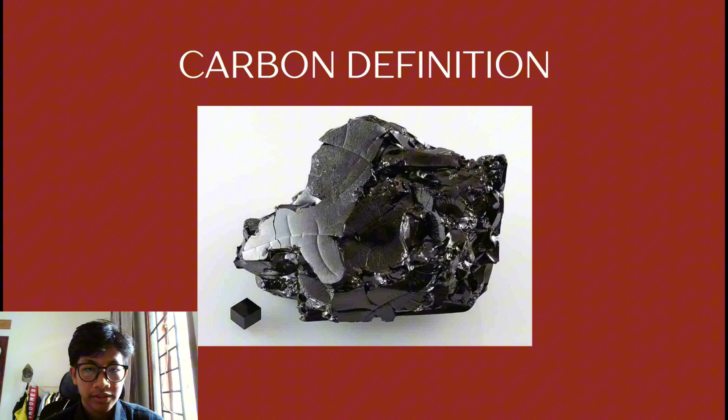Today we are going to discuss carbon and its various types. Carbon is unique because it doesn't fall within the traditional metal, ceramic, or polymer classification. To ensure technical accuracy, our discussion today is based on several key references. Our main source is Materials Science and Engineering: An Introduction by William Callister Jr. and David G. Rethwisch, 10th edition.

Carbon, the definition. Based on the textbook we use, carbon exists in two allotropic forms, diamond and graphite, as well as in the amorphous state. The carbon group of materials does not fall within any of the traditional metal, ceramic, or polymer classification schemes. This treatment of carbons focuses primarily on the structures of diamond and graphite, and discusses the properties and applications, both current and potential, of diamond and graphite, as well as the nanocarbons.

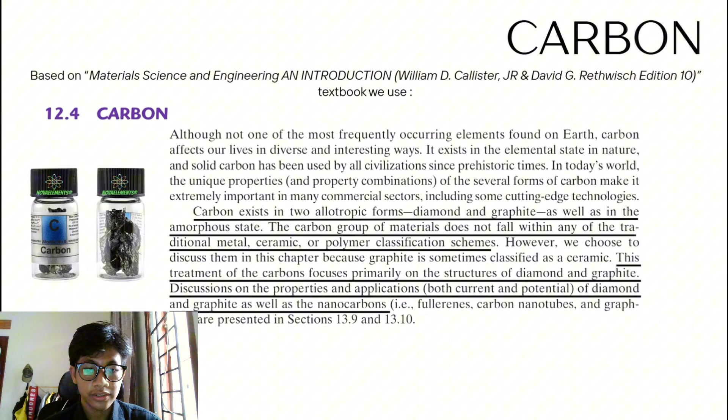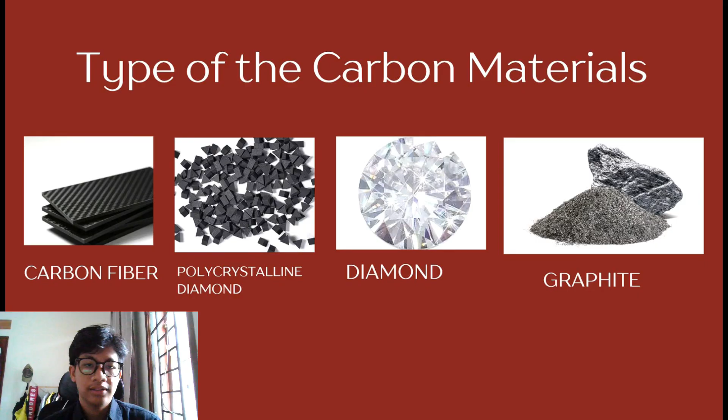Next, the types of carbon material. The first type is carbon fiber, second is polycrystalline diamond or PCD, third is diamond, and the last one is graphite. First, carbon fiber. Small diameter, high strength, and high modulus fibers composed of carbon are used as reinforcement in polymer matrix composites. Carbon in this fiber material is in the form of graphene layers. For what are termed graphitic carbon fibers, the graphene layers assume the ordered structure of graphite, planes parallel to one another, having relatively weak van der Waals interplanar bonds.

Graphene sheets become randomly folded and crumpled to form what is termed turbostratic carbon. Graphitic fibers typically have higher elastic moduli than turbostratic fibers, whereas turbostratic fibers tend to be stronger. Furthermore, carbon fiber properties are anisotropic; strength and elastic modulus values are greater parallel to the fiber axis than perpendicular to it, in the transverse or radial direction. Because most of these fibers are composed of both graphitic and turbostratic forms, the term carbon rather than graphite is used to denote these fibers. On the lower right is the structure of the carbon fiber, and beside it is a product from carbon fiber.

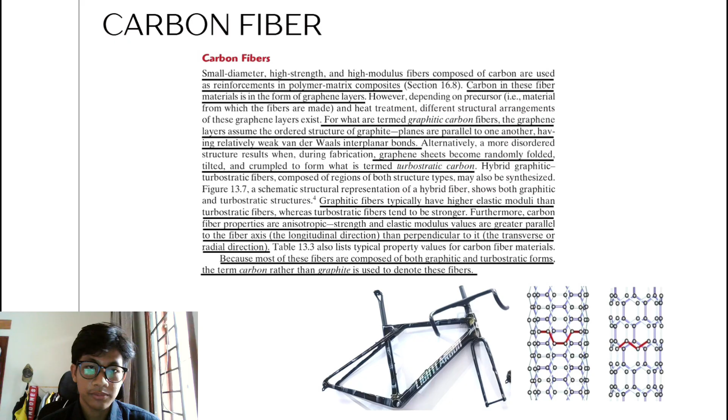Number 2 is polycrystalline diamond or PCD. A solid aggregate of many small diamond crystals or grains is used for some industrial applications. This form of diamond is created by subjecting synthetic diamond powders to high temperatures and high pressures, similar to the HPHT technique used to manufacture synthetic diamond, a process that sinters the powder particles together to form a cohesive mass. The sintering temperature is approximately 1400 degrees Celsius and pressures on the order of 1300 atmospheres are required. Typically, PCD parts are manufactured as individual inserts or pads that are attached to multi-component cutters or bearings.

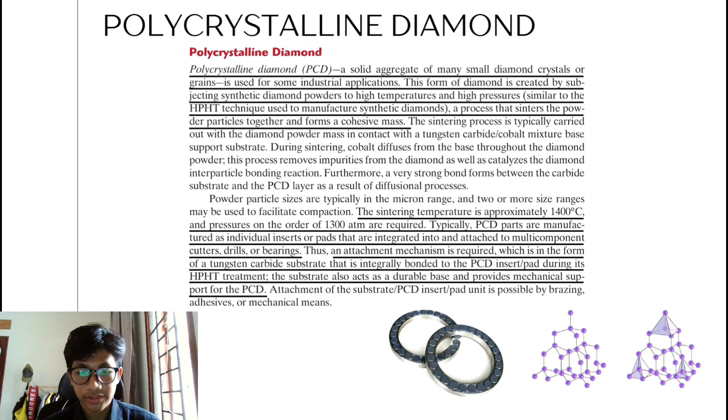An attachment mechanism is required, which is in the form of a tungsten carbide substrate that is integrally bonded to the PCD insert or pad during its HPHT treatment. The substrate also acts as a durable base and provides mechanical support for the PCD. The lower right is the structure of polycrystalline diamond, and beside it are bearings, a sample product from PCD material. Next, Anna.

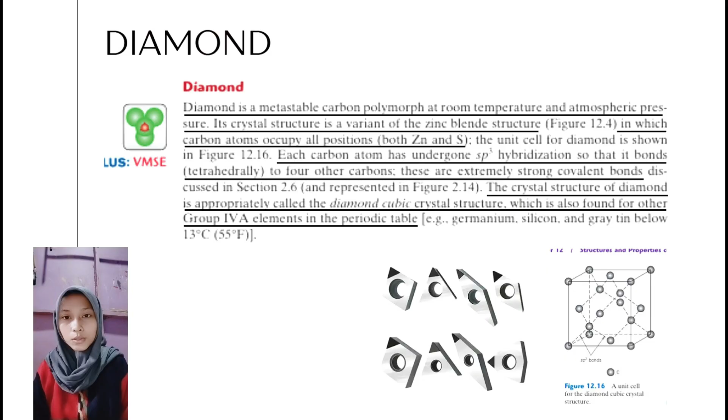Diamond. Diamond is a metastable carbon polymorph at room temperature and atmospheric pressure. Its crystal structure is a variant of the zinc blende structure, in which carbon atoms occupy all positions, both Zn and S. Each carbon atom has undergone sp3 hybridization so that it bonds tetrahedrally to four other carbons. These are extremely strong covalent bonds. The crystal structure of diamond is appropriately called the diamond cubic crystal structure, which is also found for other Group IVA elements in the periodic table. At the bottom right is the structure of diamond. Beside it is a sample product made from diamond material.

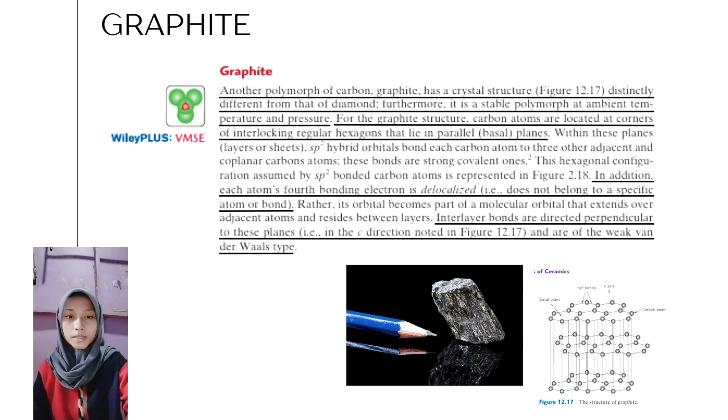Graphite. Another polymorph of carbon, graphite has a crystal structure distinctly different from that of diamond. Furthermore, it is a stable polymorph at ambient temperature and pressure. For the graphite structure, carbon atoms are located at corners of interlocking regular hexagons that lie in parallel basal planes. In addition, each atom's fourth bonding electron is delocalized; interplanar bonds are perpendicular to the planes and are of the weak van der Waals type. At the bottom right is the structure of graphite. Beside it is a sample product made from graphite material.

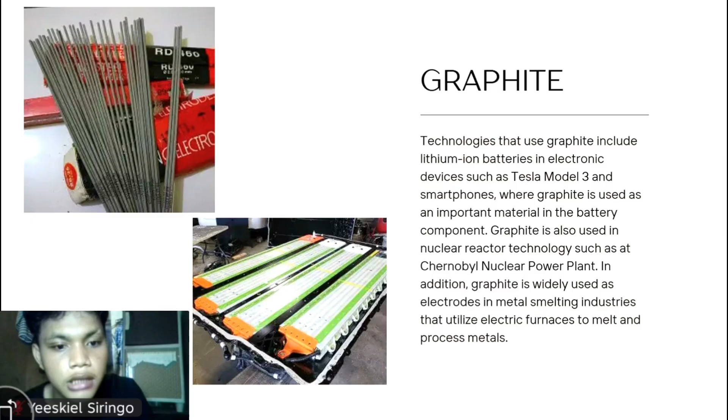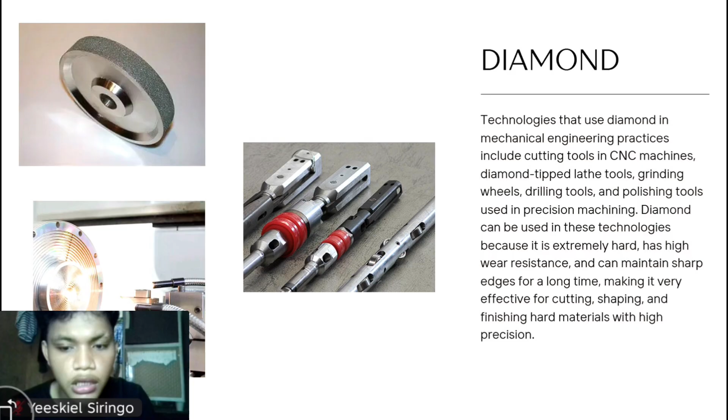Next, diamond. Technologies that use diamond in mechanical engineering practice include cutting tools in CNC machines, diamond tip lathe tools, grinding wheels, drilling tools, and polishing tools used in precision machining. Diamond can be used in this technology because it is extremely hard, has high wear resistance, and can maintain sharp edges for a long time, making it very effective for cutting, shaping, and finishing hard materials with high precision. The examples are a CNC machine and grinding wheels.

Okay, next, polycrystalline diamond. Polycrystalline diamond or PCD is widely used in mechanical engineering practice, especially in machining and manufacturing processes. Examples include PCD cutting tools for CNC milling machines, as in the example image, and PCD inserts for lathe tools, drilling tools, reamers, and end mills used for machining materials such as aluminum alloys, composites, and non-ferrous metals. The example image shows end mills. PCD is used because it has very high hardness, excellent wear resistance, high thermal conductivity, and a long tool life, which allow machining processes to achieve high precision, smooth surface finish, and higher production efficiency.

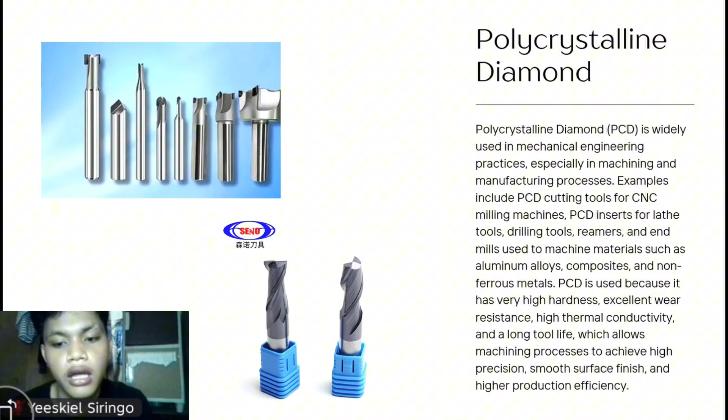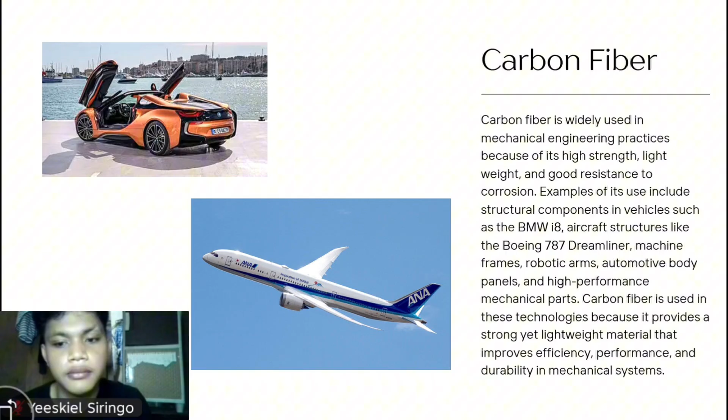And the last, carbon fiber. Carbon fiber is widely used in mechanical engineering practice because of its high strength, light weight, and good resistance to corrosion. Examples of its use include structural components in vehicles such as the BMW i8, shown in the example image, aircraft structures like the Boeing 787 Dreamliner, machine frames, robotic arms, automotive body panels, and high performance mechanical parts. Carbon fiber is used in this technology because it provides a strong yet lightweight material that improves efficiency, performance, and durability in mechanical systems. That completes my presentation for today.